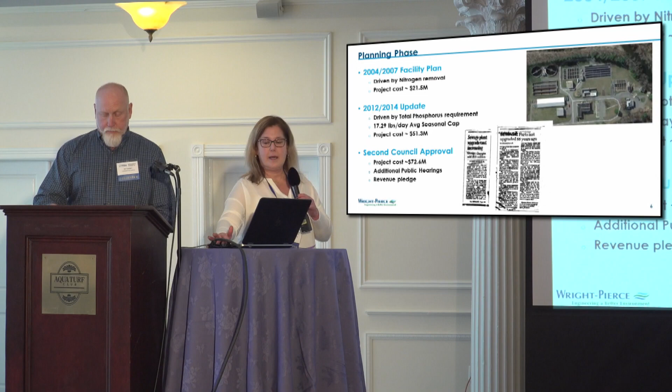There was an executive order issued by the federal government. A couple other things happened, and now the project was going to cost $72.6 million. So the city was put in a position to try and get another approval for an additional $20 million, and they were able to take care of that through a revenue pledge. However, that had to go through public hearings as well.

This first line on this slide really has the biggest takeaway, especially to the guys and young women that were up here talking about getting their management certificate. If you know you have an upgrade coming up, start pocketing away money. If in 5 years you think you have a big project happening, you don't want your sewer users to get the impact of a big project in 1 year. Often you're battling a general tax base increase at the same time. So, increasing your sewer rate a little bit each year would be received better at the other end.

The NPDES permit for Torrington, the final was dated in 2015. Along with that came the limits for the phosphorus, as well as a timeline that had to happen. They needed to be up and running April 1st, 2020. So in the first bid set of documents, the contractor was required to have tertiary treatment built and ready for 2020. Because time had passed, we elected to give them an allowance, and they could use chemical temporarily for that first year and get tertiary built by 21.

You want to speak to the other drivers? Okay, some other issues for this upgrade.

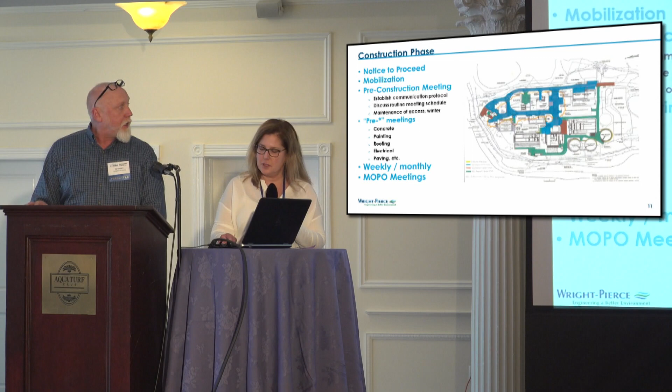So some of the activity that you had to deal with while that was happening, you had septage, right? Your septage deliveries. Yeah, so Torrington takes in quite a bit of septage, and we built a FOG facility, as Christine mentioned. So we needed to continue to keep that going through a construction site while the paving was going on. Those were interesting conversations. Let's see what we got next.

So this slide just shows you some of the things talked about during a routine meeting. Safety is always first, so because of COVID also, we had to set up protocols for how to deal with COVID. We did go to Teams meetings for a while. If any one of the entities had a positive test, there was the communication protocol. The project never shut down. There were some subcontractors that didn't come to the site at certain times when they were planned to come to the site.

So if you recall, the first year of COVID, I think we all probably were under very similar protocols. It was usually quarantine for 14 days, way back in the beginning. So we'll go on about how many extra sludge trucks we had. We had a lot of extra work, but we were losing staff on top of it, in the middle of it, because of COVID. For 14 days. If they were really sick or not, sometimes they weren't that sick, but you had a quarantine. So it was another challenge in the middle of this.

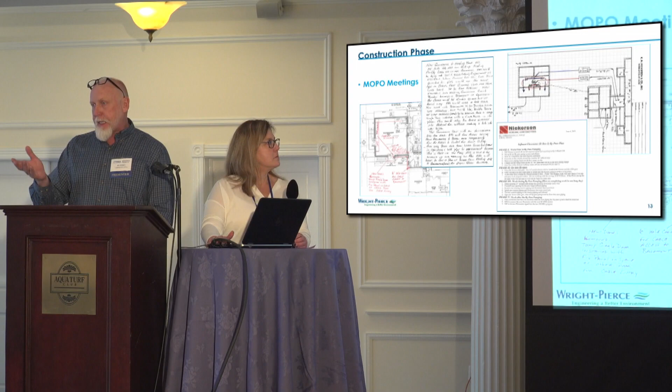Some of their tie-ins were done from ideas from their experience, from doing plants in the past. Such as if it was like a 2 or 3 hour tie-in, we learned to prepare for it ahead of time, take a couple primary tanks down, then during low flows, divert all the flow into those empty tanks, and that gave them the couple hours they needed. Worked well. Yeah, so where we thought they might need 4 bypasses, they only wound up needing 2 for this project.

Okay, so you said different projects sometimes handle this differently. Torrington elected to put meters on all water and secondary electric that the contractor was going to use, and it ended up to be a trade item for that cost for us. But also, you've got to budget for quite a bit of extra overtime. You've got to work kind of around the hours they're going to choose to work.

Like these bypasses I was talking about, you're coming in early in the morning, like 4 in the morning to begin those. The paving operation was really 16 hours a day, so just be prepared for that kind of overtime.

Same with your effort helping them with cleaning tanks. Yeah, sometimes you were always cleaning tanks, taking tanks down. It was our responsibility to take it down once, but sometimes that happened multiple times for different reasons.

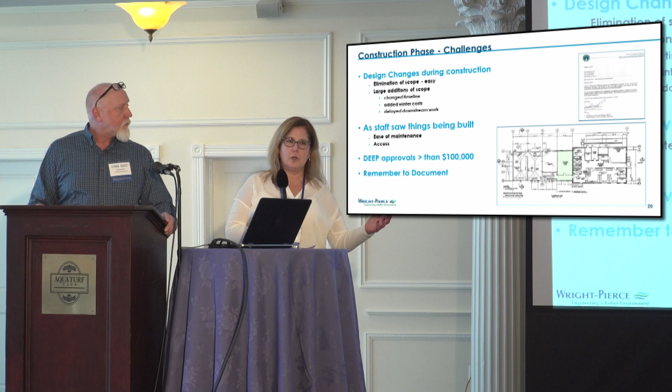Meanwhile, we had already gotten the submittal for the garage building and were reviewing that. We had a couple go-arounds on it, it's pretty easy to tell them to make it 20 feet longer, everything else the same. While that was going on, the rest of the coordination was going on, like electrical, etc. What that really did was add time to the construction, which pushed masonry work into the winter, which the contractor wanted money for to heat the building so they could do masonry. So be cognizant of the types of changes you ask for during construction, they happen differently than during a full design project.

This next item, as things come to fruition or as they're being built, the staff, especially the maintenance guys, would see what they had to deal with. Something as little as where there was concrete curbing and they needed to plow snow off to the edge, they'd make those kinds of changes on the fly. Those are pretty small, but again, that goes back to making sure you can be involved, or ask to be involved, during design so we can do it the way you want. We don't operate these plants, so I learned as much from them as hopefully they learned from us.

Just a quick reminder, DEEP approvals need to be done for anything greater than $100,000, and that's not net. So if you have a $150,000 change order and it gets paired with a $60,000 credit, you still have to get that pre-approved before you do that work. And because things are moving fast on a construction project, and we can make phone calls, texts and emails to get approvals, be as good as you can about documenting changes. We were, again, a 3-year project. In year 3, we were trying to remember why we came to a conclusion or decision that was made in year 1. It's easy to search emails, but nonetheless.

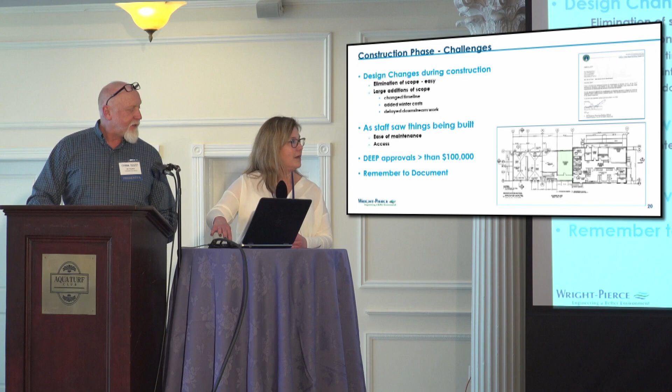This is working. Help, what? It's not moving. Won't go? It's locked. Okay, not a touch screen.

One of the big increases in the middle of the project was we switched from liquid sludge to cake, and so we went out to bid. It was shocking, and I think a lot of us have been hit with the new costs of sludge removal and transportation disposal. So that was shocking. I probably would have seen it anyway, but because I went out to bid, I saw the new prices quicker than probably most.

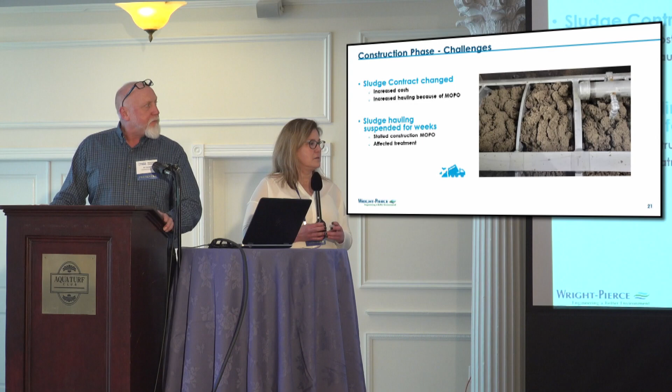During that period, one of the things I would have probably done differently too - there's things the contractors are required to do, temporary systems they're supposed to put in place. And they'll be creative, they'll figure out a different way to do it or try to talk you into a different way. One of the things that happened is they had to pull out our gravity belt and construct and bring in screw presses.

And they wanted me to continue doing liquid sludge without the dewatering system, but he was going to pay for the extra trucks. I don't think... he said it would be about 4 weeks. I think it ended up being about 4 months, running into the summer, when you can't settle sludge anymore very well, the late summer.

I don't know if he knew or didn't know the exact amount it would be. So we went from 2 to 3 trucks a day, 5 days a week, to about 8 trucks, with the increased costs. So, yeah, that's not only just the cost of the trucks.

As you all know, you need manpower to load those trucks on a regular basis. That increases your day, that's another thing that increases your day. So just something to keep in mind.

I mean, had I been... if I could do it over, I would have made them. I don't even know if they knew where to get a temporary solids handling unit, but that would have had to happen. It was a lot of expense on the town.

We also dealt with this last summer - was it this past summer or the one before - where the incinerator was down for repair? So we got the screw press turned over to us, and within 2 weeks the incinerator was down in Naugatuck, and they wanted me to go back to the same liquid process for 4 weeks.

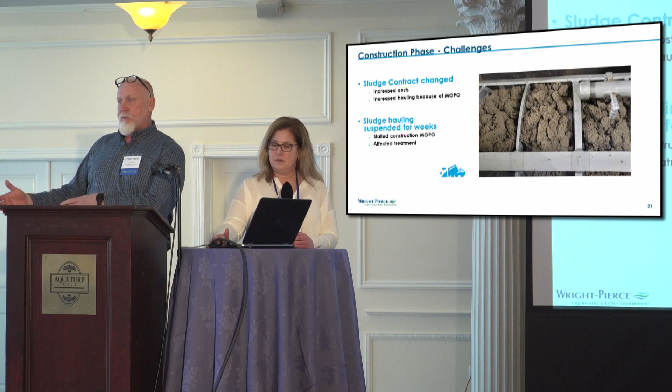That's one of those unforeseen things, though. That was no fault of the contractor. That warranty was ticking away. That piece of equipment was sitting there, but not being operated.

And so as we wind this down, we just included a couple of pictures to show you random activity on the site. This is the third final clarifier that was being built.

So I was saying, because I worked on these myself in the 80s into the 90s - you see the way they're piecemealed together, a round tank like that? We used to do the whole pour at one time, the whole base. I could think of some plants doing a base slab like that was a 12-hour pour, nonstop. But yeah, they do a lot of different methods now in 2020, a lot different than what we used to do.

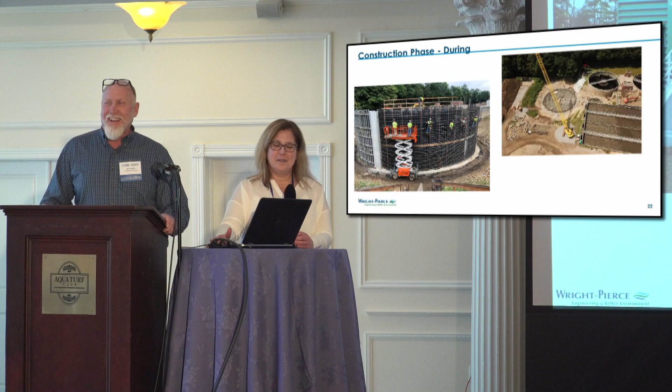Pictures of, you know, you're going to put all this instrumentation and control in your aeration tanks if that's the kind of upgrade you're going through. Visualize the need to get all the conduit out there and the air piping out there. So what was once an open tank with some old hand railing, you start to see this above-grade infrastructure come into play.

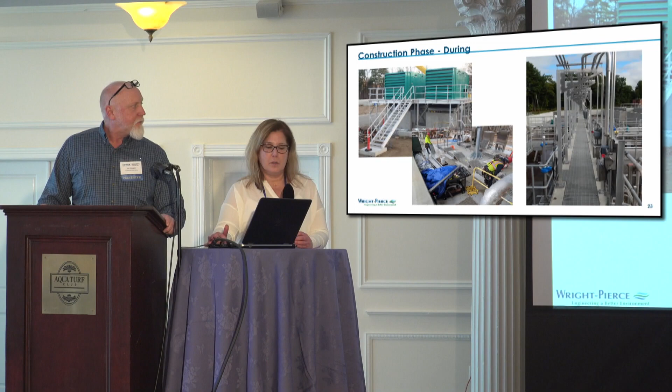Tight spaces - when you're going through a rehab with an existing plant, you have to put big pipes in tight spaces, creative. The contractor is really good about creatively figuring out how to put things in. That's a good shot of the conduit in the bottom there. That's underground at our plant.

Right, that's into the... electricians had their work cut out for them. All of the electrical was replaced. That's the main service feed into the electrical room.

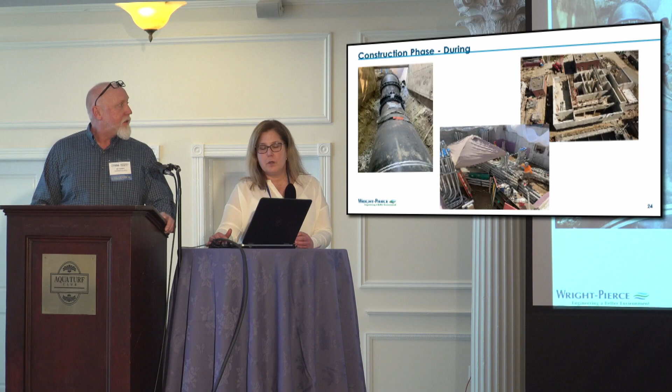The photo on the upper right is the tertiary structure and all the intricate pours and walls involved with that. That's a ballasted flocculation system. That's the original plant picture.

And then just some key takeaways - it's a lot of, how you go through your upgrade is related to the workshops you're involved in, your input to them, the relationships you have with the entities involved: contractor, engineer, and the owner. Keep the communication open and document things.

And that's just a brief overview of the last, say, 6 years. Any questions?

Not a question, but thanks for the flashback of 10 years of my life. Yeah, I toured that. That's right. Actually, we toured Manchester right before we started ours, if you recall.